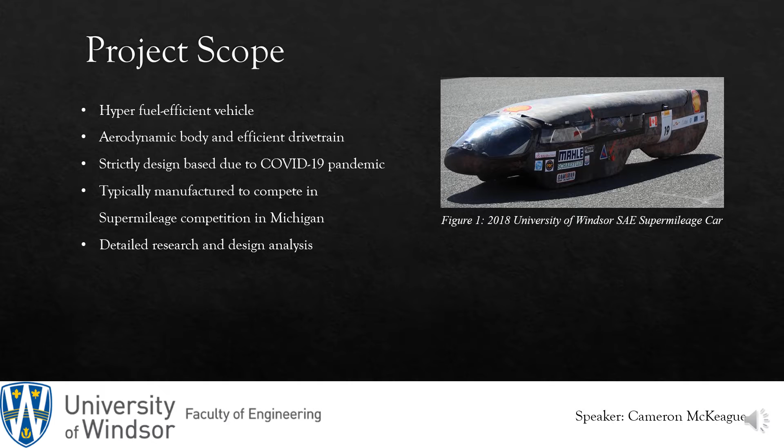With the COVID-19 pandemic, it is important to note that the team's work will be exclusively theoretical and design-based, thus no manufacturing or physical work will be executed. Therefore, the design will be aimed to compete at the 2022 Michigan SAE Supermileage competition as past years. This means that all of the team's resulting work must have a high emphasis on detailed research and design analysis.

The team's constraints are focused primarily on the SAE Supermileage rulebook to ensure that the vehicle would be eligible for a physical competition in upcoming years. Given the COVID-19 pandemic, the most recent iteration of the rulebook was issued in 2020. Therefore, all regulations will be made in reference to that iteration.

The regulations that constrain the design of the powertrain subsystem are the contents of Article 2, 3, 4, and 7. Article 2 describes the power unit itself, where a spec engine is selected by SAE. Further description of allowed and banned engine modifications are listed there as well.

Article 3 describes the spec fuel bottle provided by SAE upon arrival at the competition as shown in Figure 2 of the regulations. Article 4 explains the limitations on fuel systems. This section is not part of the scope of this project, but it must be acknowledged during the design process.

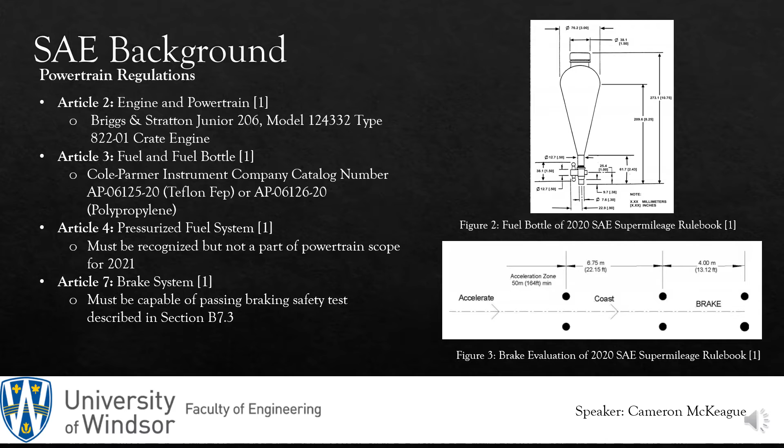Article 7 describes the braking system and the safety test the car must pass. The vehicle must be capable of braking from 24 kilometers an hour to rest within a 4-meter distance in a relatively straight line, as shown in Figure 3 of the regulations. These 4 articles are the primary constraints of the powertrain team during the design process.

The chassis subsystem is predominantly constrained by Articles 1, 5, and 6. Article 1 ensures that the steering system is capable of achieving a maximum of a 15.2 meter turning radius. It also demands that the structure of the vehicle is capable of holding a minimum of a 130-pound driver.

Article 5 ensures that the driver must have access to a kill switch system to remove all live electrical power from the vehicle for safety precautions. Finally, Article 6 demands a roll hoop positioned 5 centimeters above the driver's helmet, which is wider than the driver's shoulders, and it must withstand 114 kilograms applied from any direction.

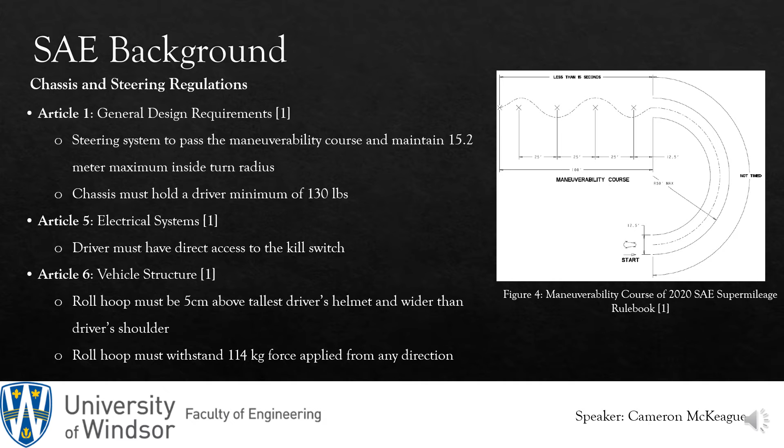The body and aerodynamic subsystem of the vehicle is constrained by Articles 1, 6, and 9. Article 1 demands a 180-degree frontal field of view from the driver's position. Article 6 demands the body must include sufficient space for a roll hoop and firewall, and the driver must be able to egress the vehicle within 15 seconds. Finally, Article 9 demands the implementation of mirrors for rearward visibility.

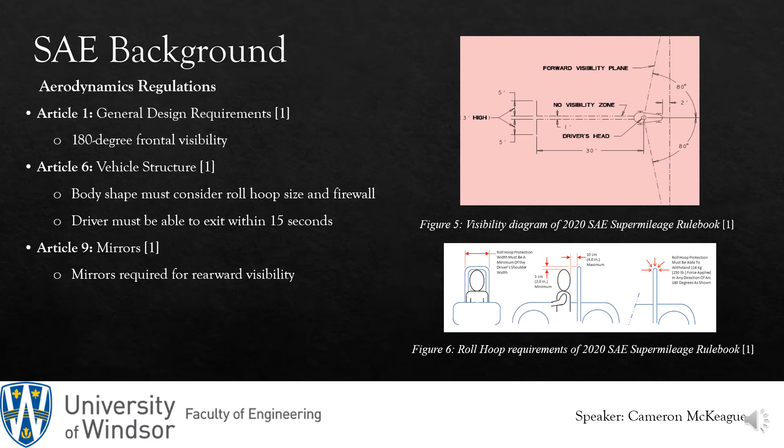Due to COVID restrictions, many research and development aspects of the powertrain have been limited, shifting focus to the design aspects. The drivetrain will have a single-speed, chain-driven design adhering to Article 2 in the SAE rulebook. Engine packaging will be optimized within the limited space to give aerodynamics more freedom in their design.

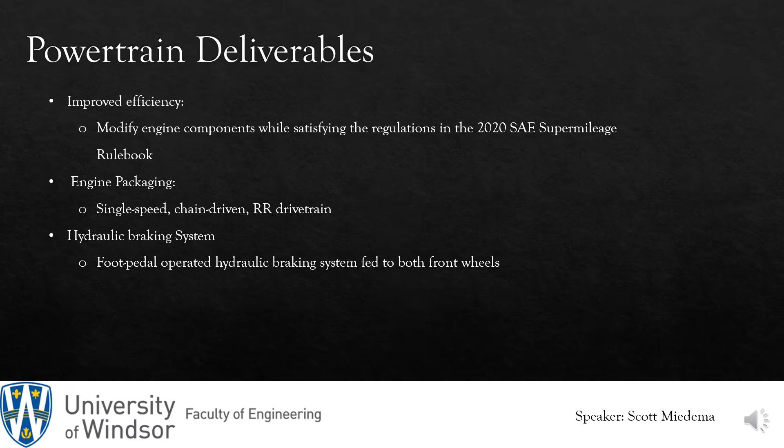Additionally, a hydraulic brake system and clutch assembly will be included with dynamic systems, failure prevention conditions, and computer-aided software models. The chassis will be a monocoque design, with drivetrain, steering components, and driver carefully positioned to balance weight on all 3 tires. Manual steering will be used to reduce weight, as assisted steering is not needed for such a lightweight application.

Safety measures will be put into place to ensure there are no restrictions when the driver is in a full steer situation, and also to make sure that the driver's vision is not impaired. Lastly, detailed calculations of vibrations and dynamic components will be assessed.

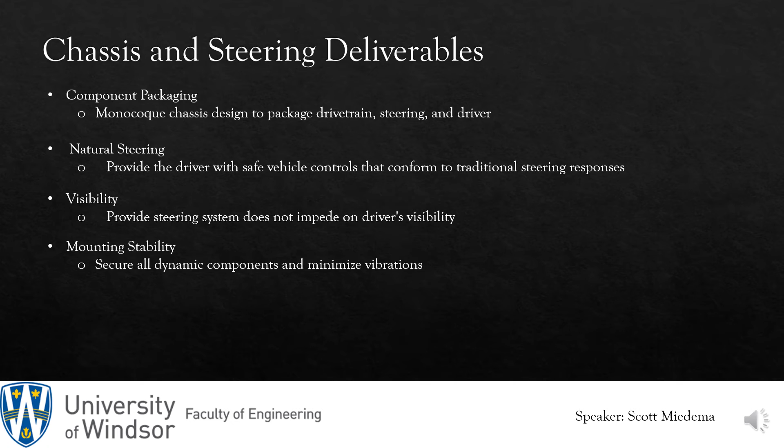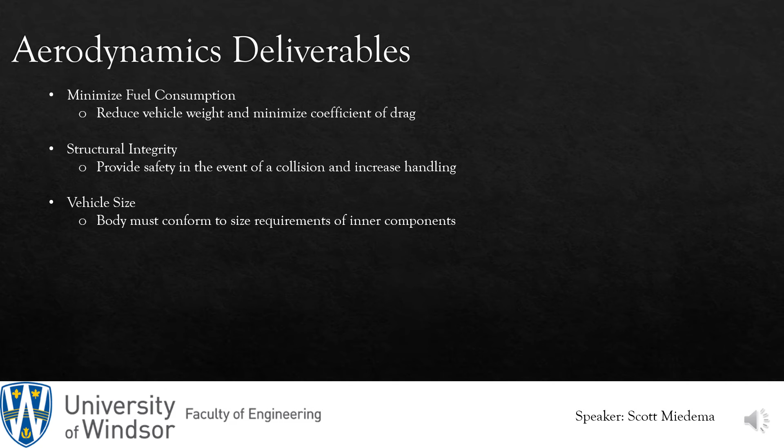For the aerodynamic team, reducing weight and minimizing drag coefficient will be the most important factor when choosing a final body shape. With the monocoque body, structural aspects will also have to be taken into account as there is no complete frame under the body. Throughout the design phase, dimensions will be checked to ensure that standards are met and that all internal components will have ample room.

An important part of the powertrain design is the engine packaging. An engine mount will be used to fix the engine block to the monocoque body. Calculations will be made for transmission gear ratio from the driven to the drive gear, as well as fuel efficiency and speed estimates. Right now we're looking at an approximate 16:1 drive to driven gear ratio. This will depend on the wheel size that we decide to use at a later date.

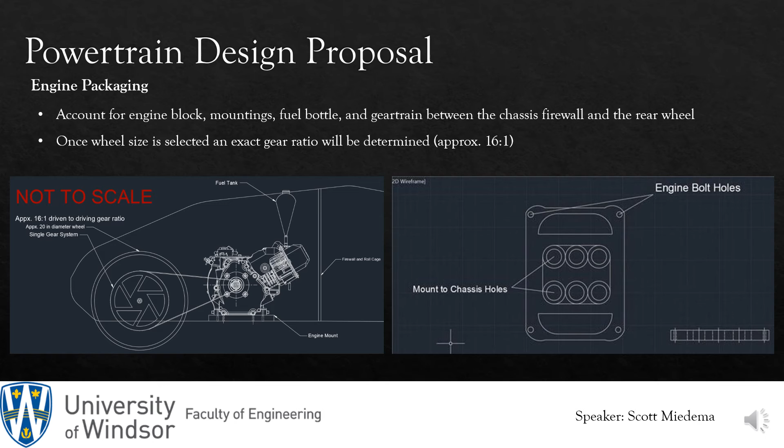We're also looking at different options for clutches to purchase. And it will be important to get an overall size for the packaging, as the engine is one of our biggest assemblies and fitment constraints. Additional to the engine packing, powertrain design will also focus on the braking system.

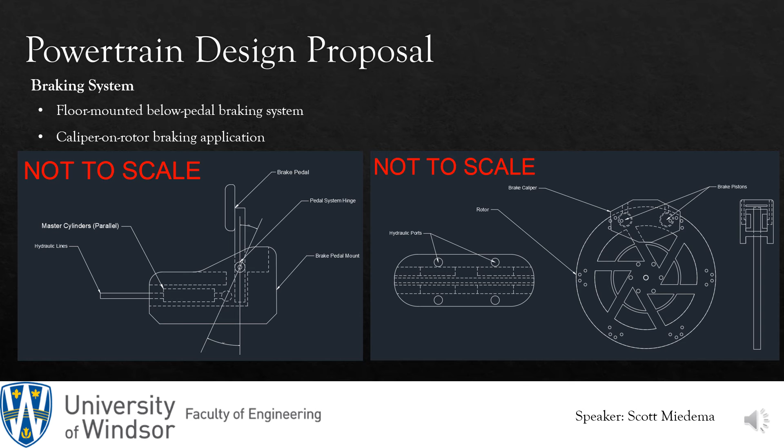The braking system will be floor mounted to avoid driver sight issues, as it is very compact in the body of the vehicle. The master cylinder will be sourced with custom pedals and mounts. A caliper-on rotor design will be used compared to a caliper-on rim setup, as it has more braking force. The design setup is still subject to change and modification depending on constraints by other teams.

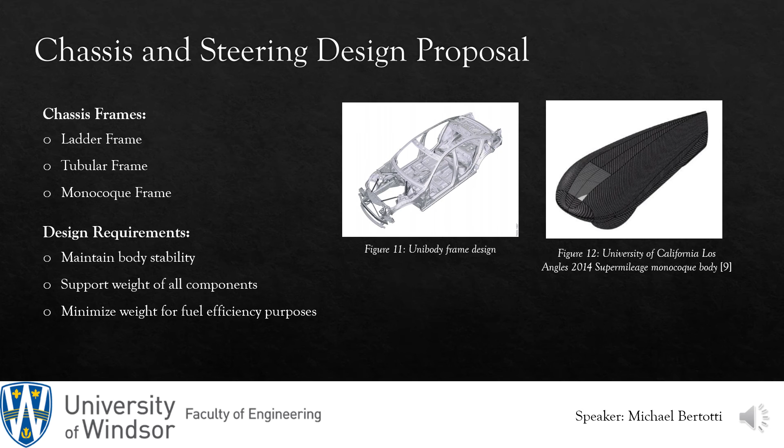The idea is to maintain body stability, support the weight of all components, and minimize the weight for fuel consumption. This design allows it to have a sleek look and a very functional design. An Ackerman steering system is selected due to its simplicity in design. This can prevent a steering failure from happening in a more complex system. A simpler design will require fewer components, which decreases the amount of weight needed for the system.

Handlebars will be used over a steering wheel because they'll increase the driver visibility. Being such a compact space, the larger steering wheel may impede driver vision. Going forward, additional calculations such as Ackerman angles will be used to calculate dimensions of the whole steering system.

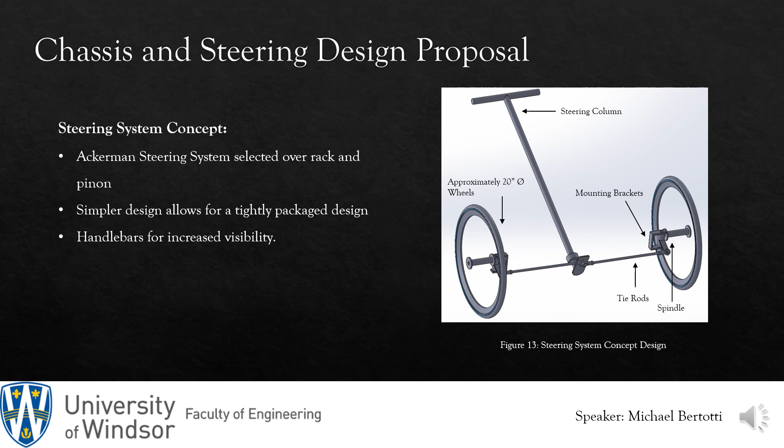Another key component to a successful design will be the overall weight. To further reduce this, a carbon fiber composite will be used due to its high tensile strength and lower weight. It's about 15% lighter than fiberglass and does not require a metal frame behind it. Through a lower weight, smooth airflow, and good body integrity, the design of this vehicle will be optimized.